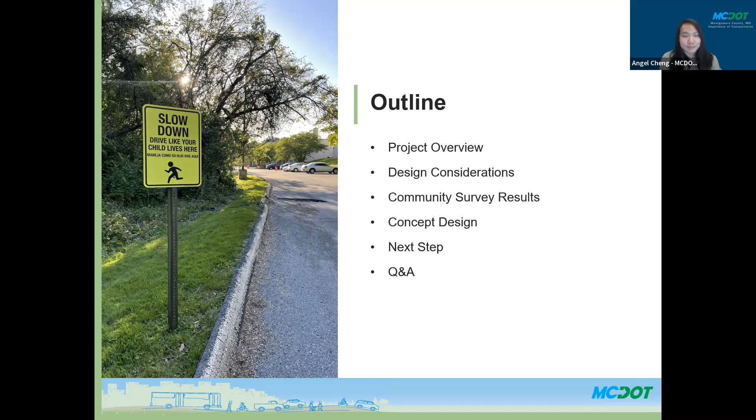Project overview: we are proposing a neighborhood greenway on Upton Drive. The project limit is from East Avenue to the entrance of the Crossway Montessori School. This map shows our project location. The yellow line indicates the project limit and the corridor we're studying. This is University Boulevard, this is Veirs Mill Road, and this is East Avenue.

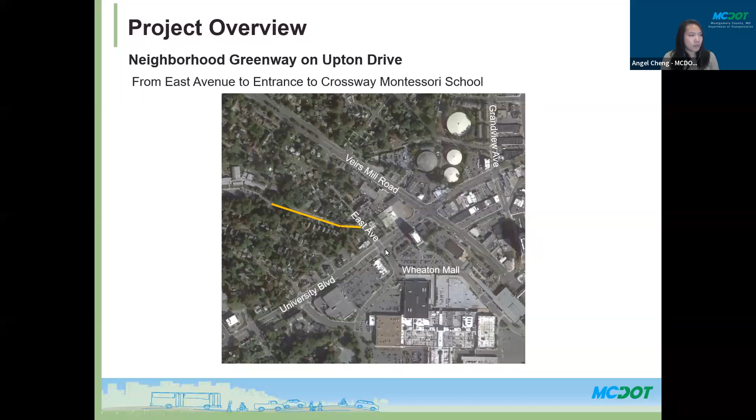A little bit about the current project milestone schedule: the project was kicked off earlier this year in September 2022, and we're currently here in November 2022 at the first public meeting. We'll collect comments from the community through December 2022. After that, we'll brief the county planning board on this project and share the final design plan in spring 2023, when we'll have another public meeting. We hope construction begins in late summer 2023. I apologize if you can hear my dog barking in the background.

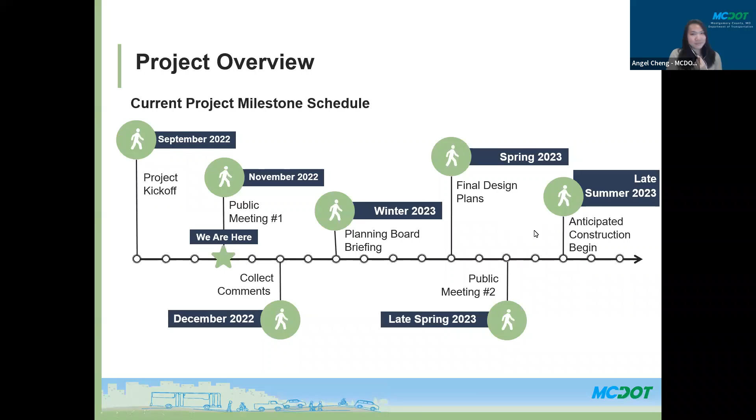So let's talk a little bit about what a neighborhood greenway is. A neighborhood greenway is a street designed to give walking and biking priority and to reduce vehicle speed and volume. We use tools such as signs, pavement markings, speed countermeasures, and volume management measures to discourage cut-through trips by vehicles and to create safe, convenient crossings of arterial streets for bicyclists and pedestrians.

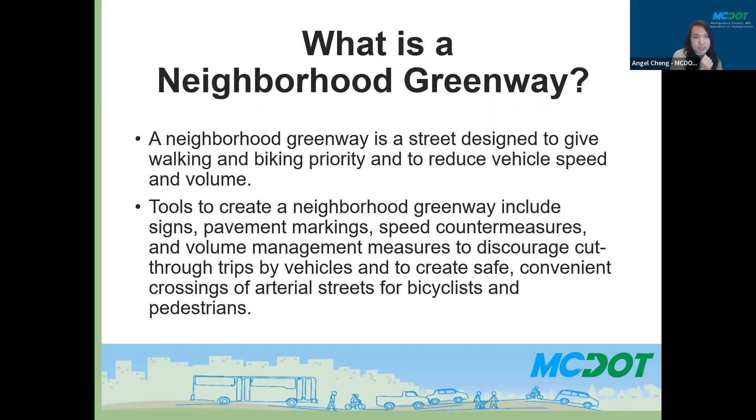Some traffic calming strategies we've looked at are horizontal deflections, including splitters, where a vehicle goes around a splitter island to split the traffic into two. There's something called a chicane, which has vehicles meander through a street, and a mini roundabout, where all vehicles must go around in a circle to meander through the intersection.

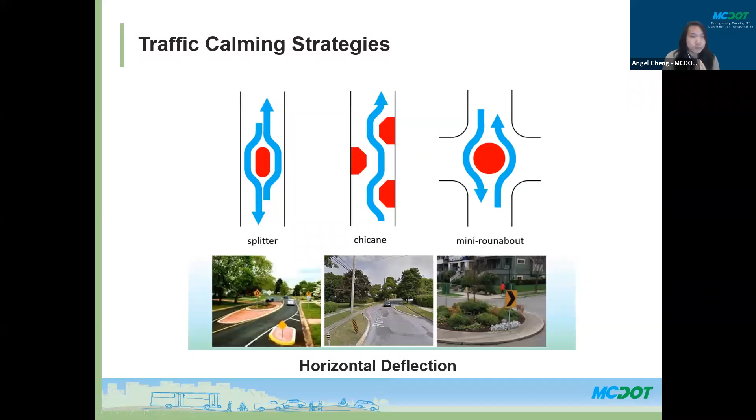We also looked at narrowing strategies for traffic calming. An example would be a choker, which narrows down the street with a physical barrier—in this example, using a planting area to create the choker. Another example of narrowing is using a bump out or curb extension, which shortens the crossing distance at the crosswalk and brings visibility to pedestrians at the intersection.

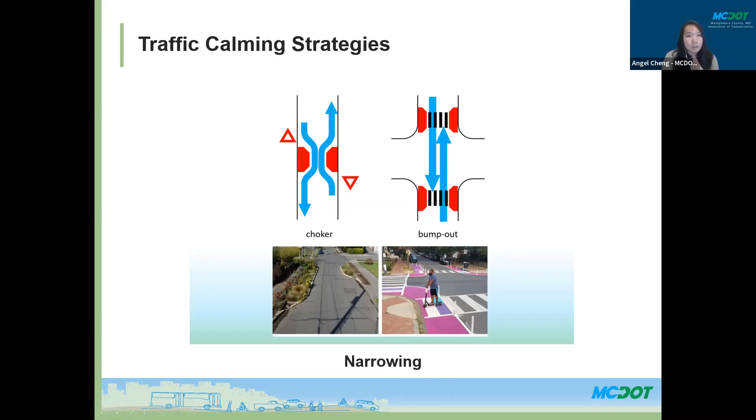Some of the design considerations for this project include providing safe crossings for pedestrians and cyclists on Upton Drive, looking at connectivity to existing sidewalks and nearby destinations, and minimizing impacts including residential frontage, environmental resources such as trees and streams, and existing utilities on this road. Other considerations include maintaining the existing neighborhood aesthetic, as well as considering existing bus and school bus stop locations.

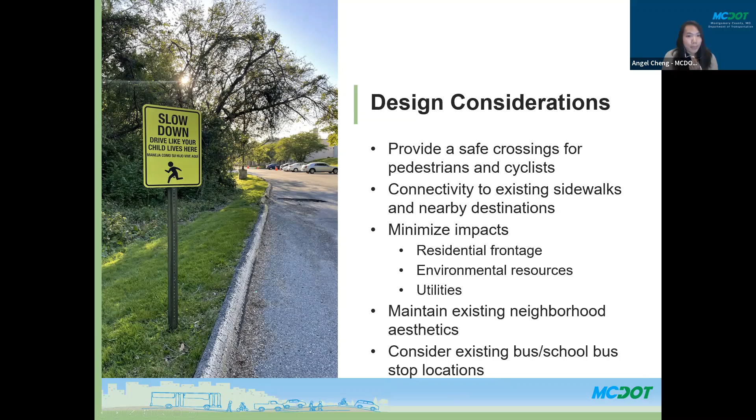Now we have done a traffic speed and volume analysis as part of this project back in early June. We have collected data on both Upton Drive and Hillsdale Drive. Both have a posted speed of 25 miles per hour. On Upton Drive, we recorded an eastbound 85th percentile speed of 29 miles per hour and a westbound 85th percentile speed of 28 miles per hour. On Hillsdale Drive, we have a northbound and southbound 85th percentile at both 19 miles per hour.

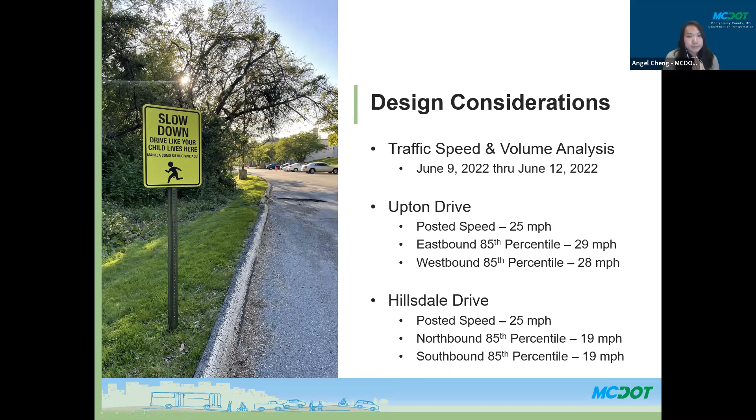Good evening, everyone. I'm Cameron, a planning specialist here at MCDOT. Getting into the community survey results, there were about 18 to 20 respondents, residents that responded to the survey. Of those residents, 56% did not live on Upton Drive directly, and 44% did.

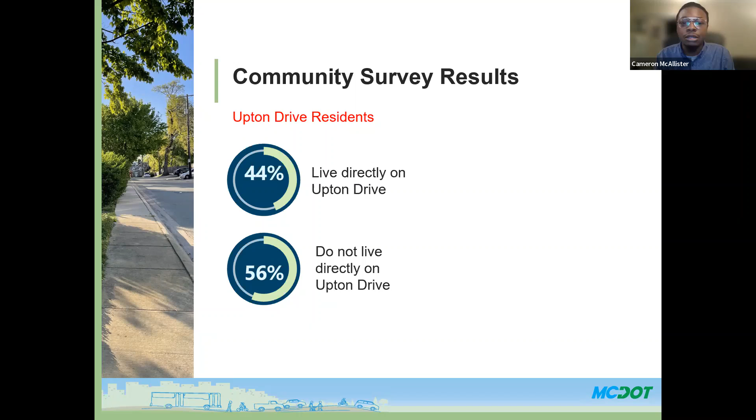Out of the respondents, asked how often they were biking or walking or using the pedestrian facilities that currently exist on Upton Drive, 50% of them said about every day, so it's still getting pretty good usage. When asked if there were improvements on Upton Drive for biking and pedestrians, there was a 61% result of residents saying that they would use it more.

And on a scale from 1 to 5, asking who was in support of improvements for biking and pedestrians, the average answer was 4.33.

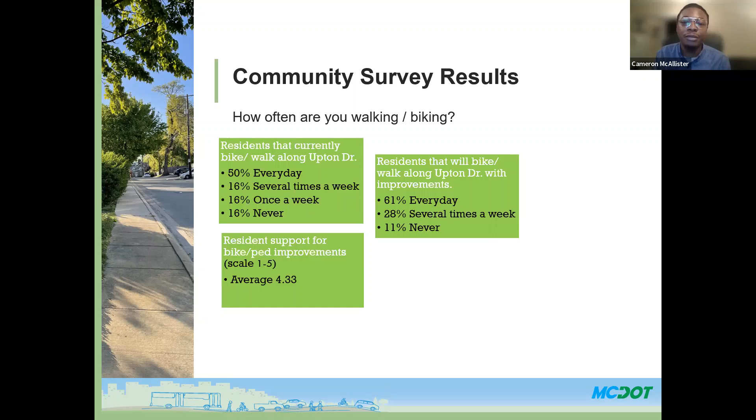So the main places that respondents were biking and walking to, the main one was exercise. Behind that is accessing transit, shopping. There were 0 respondents for school, but as you'll see in the comment section, this is more about the demographics of who actually responded to the survey, since it may not have included any school-aged kids, because we didn't ask the age of the respondents.

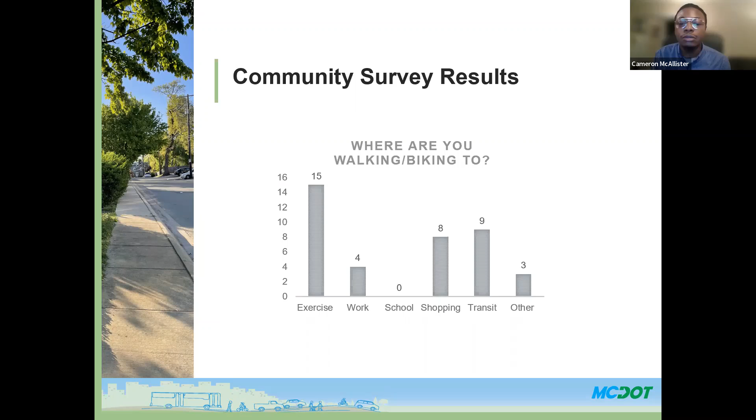The respondents were pretty much in favor of improvements all over for the pedestrian and biking walkway on Upton Drive. Sidewalks on both sides was the only one with some concern, mainly regarding yard space and that nature of impact.

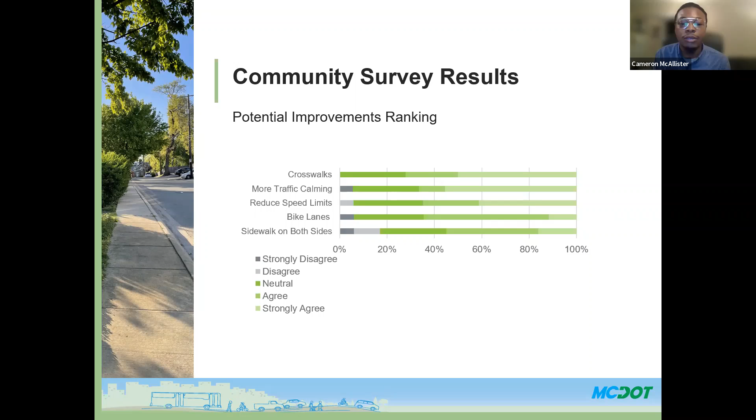The comments that stuck out from the community survey results are that cars come out of Crossway Montessori way too fast. There was a kid that got hit by a car, so speeding, lower speed limit, and traffic calming is essential. Currently, high school students do walk in the middle of the road, even though there are sidewalks. And the stop sign at Upton Drive and East Avenue is not effective because it's usually blocked by trees and not perfectly aligned with the McDonald's exit.

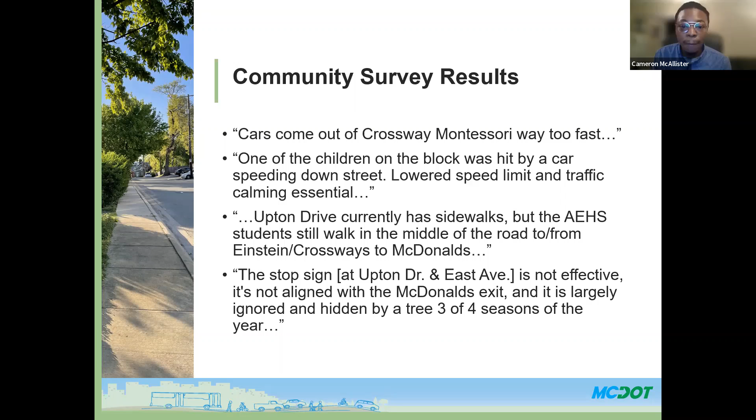My name is Moyessar Mohammed. I'm the civil engineering manager at Shalari Associates, and we are the designer of record for this project. As you can see, this is the concept design that we developed with the county. This is just an overview showing the entire limit of work. On your right-hand side, you see East Avenue coming up to the Montessori School. At East Avenue and Upton Drive, we used the Green Highway Design Manual for Montgomery County, using crosswalks and also bumping out the curb at the southeast corner of Upton Drive and East Avenue.

Also at Hillsdale, we did a bump out on 3 sides from the two corners, the south and the northern part, and we also put a crosswalk at this location. Also in the middle between East Avenue and Hillsdale, we had a splitter, kind of a lane divider, which is going to help reduce the speed limit. The overall goal here is to reduce speed and improve safety, that's the number one goal for us, and we can definitely achieve it using this level of devices.

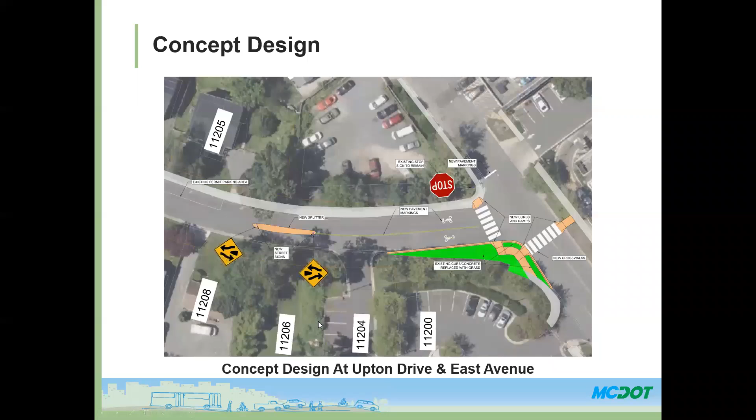Are you talking about this side? Yeah, but further down between Hillsdale Drive and Crossways. Oh, no. So if I may just show you a little, hold on.

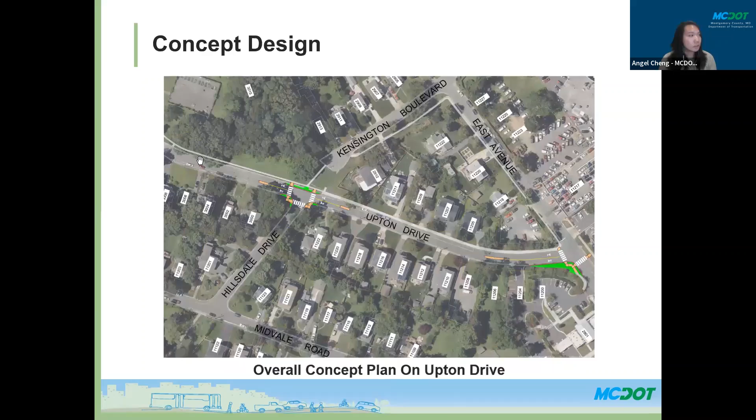I think I can zoom in on here. Can you see a little better? Apologize that this is not very clear.

So no, they're not losing any parking. What we're proposing is basically putting pavement marking down of where the parking's supposed to be. I think that will help with cars not feeling like they have all the pavement width where they can just speed through Upton, once we've put the pavement marking down and outlined where the cars should be, instead of no lines like right now.

So yes, the parking will remain. Okay, thank you. Yep, thank you.

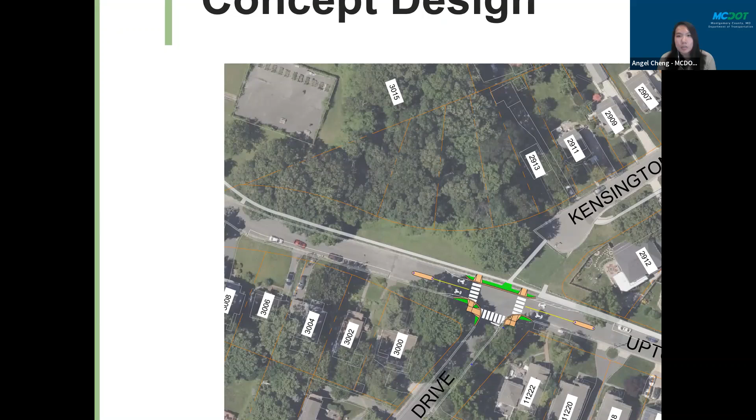Hi there. Can you hear me? Yes. Okay, great. I have a few questions.

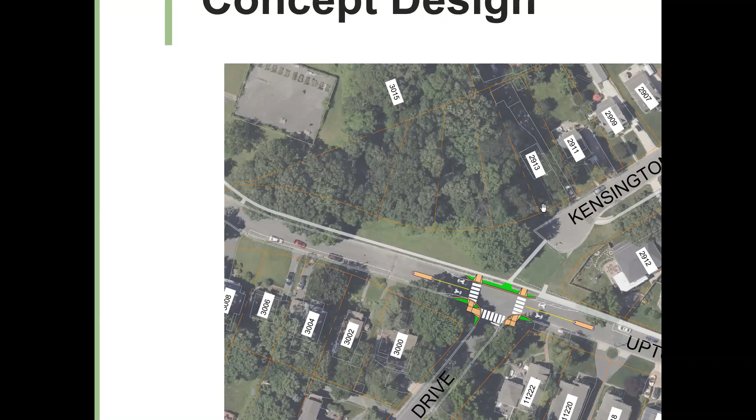First of all, thank you, Eleanor, for raising some of the ones I was thinking about as well, especially as it relates to the Gateway project, thinking through whether it makes sense to make these improvements before the Gateway project has been built, or in coordination with the project, so that it's responsive to those large buildings about to join our neighborhood, and ensuring, especially at that intersection at Upton and East, that they too are looking at that. So thank you for raising that, Eleanor.

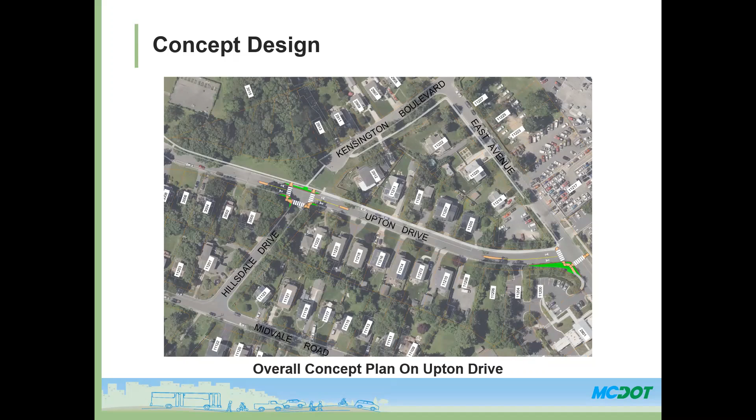Okay, in no particular order. One, I'm interested, especially at the Hillsdale and Upton intersection, in how the work you're talking about impacts drainage. That field to the right of the sidewalk, where Kensington Boulevard ends and Hillsdale starts, is like a giant drainage location. Our neighborhood has a very high water table, we all have two sump pumps in our house, so if you mess with the drainage, we all get real wet basements. It's real important that we have spaces for water to drain.

I'm just going to run through questions, you can take them in any order. Second, I appreciate the crosswalks and all of these things, but I'm not totally clear on how this solves the students walking in the middle of the street, or anyone for that matter, which is a serious issue on this street. Einstein High School is an open campus, McDonald's is at the top of our street and Einstein is at the end of our street, so it's pretty clear why we have a lot of people walking on our street all the time. Those folks, I guarantee, are not listed in your survey, so I'd love to hear more about what you're going to do to encourage folks to actually use these systems you're putting in place.

And then there was a public meeting involving our general neighborhood area recently about the Veirs Mill Randolph Road traffic calming situation, where they're putting in crosswalks and things, and a bike lane there. So how does this bike lane situation match or lead into that bike lane? Is there any connection? It's literally one street over. And if there's not, why is there not? And then where do these bike lanes go? Do they just end at Crossways? Is there interest in moving them somewhere? Where does somebody go with these bike lanes?

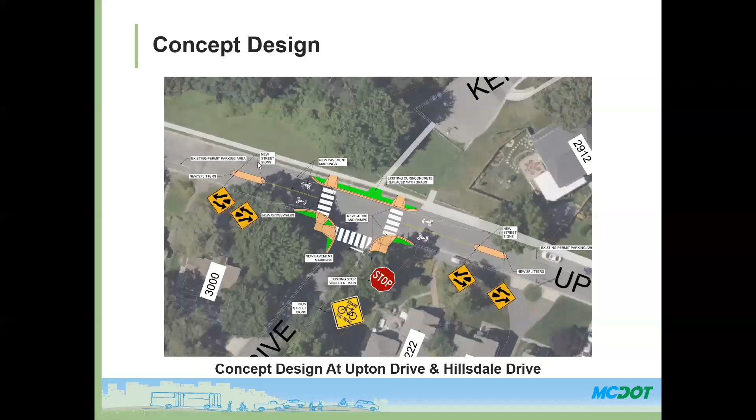I'm sorry, I have one more question. When you put up the concept design area around Hillsdale and Upton Drive, I asked about the lower part - will they lose parking? And you said no, they won't. But on the upper part, Jessica Lebinsky lives right there, they currently have residential parking on both sides of the road. Is one side going to lose parking with that island you're putting in? We don't - it's only on one side of the road. It's on the other side from you, Jessica? Yeah, it's on the opposite side of me, Eleanor. Oh okay, okay, okay, thank you.